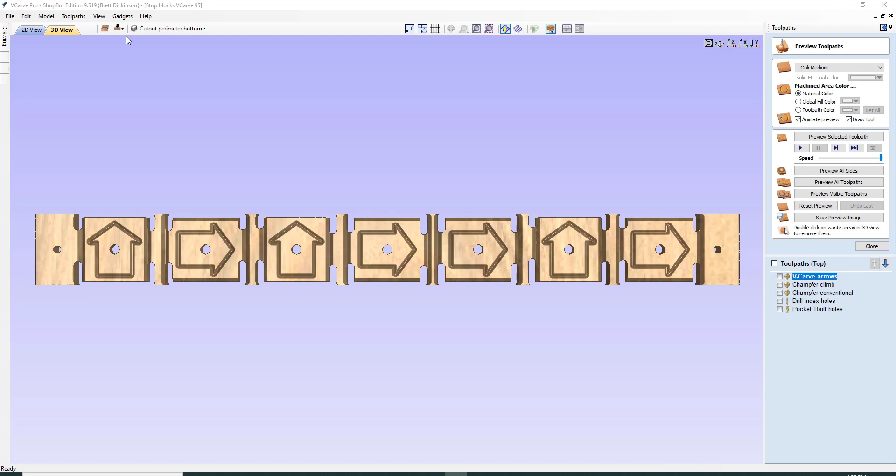First of all, we have the two views of the 3D view. This is what it will look on the top, and that is how it's going to look on the bottom.

To machine this, first of all, on the deck of the desktop right there, we have two index holes, one on each side. It's going to be flipped over like this, lengthwise. And these are the holes that are to be used for the T-bolts.

Next, these are the arrows, the directional arrows, which way they'll line up in the T-slots. Again, there's the other indexing hole right there. First of all, this is going to be screwed down. You're going to drill all the way through your oak material, all the way into the spoil board, and that's where the dowel pin will go. And these are our arrows, and that will be the first thing we'll be creating.

Next, we're putting a little bit of a bevel. You can see right there, we're creating a little bevel on the sides of each one of these blocks. That's done with the same V-bit, but with a profile toolpath. And this is the top already done.

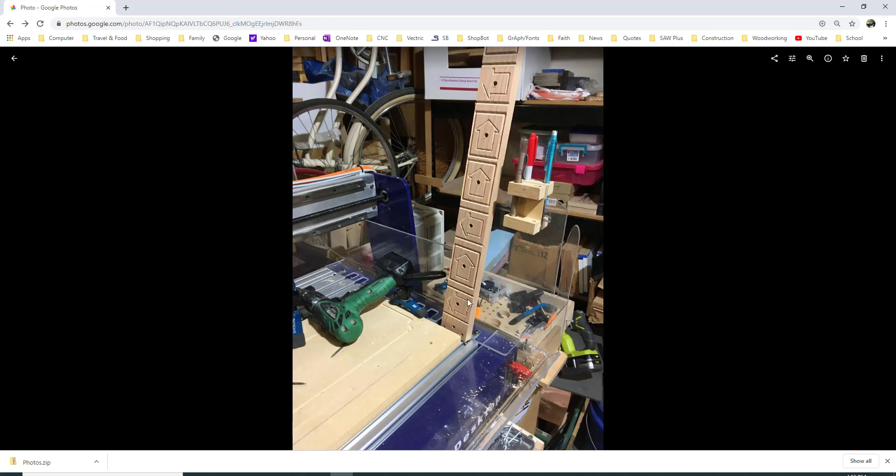It's ready to be flipped down. And you see there, right there will go a dowel, which is right there. And then we fasten that back in.

Once we've flipped and secured that piece, we're going to start machining the bottom side. The first thing you'll be doing is you're going to be pocketing out the middle. Of course, that screw is not to be put in until the pocketing is done. And the purpose of that screw is to give some additional support when we start doing the cutouts of the blocks. So we'll be doing a toolpath just for the center.

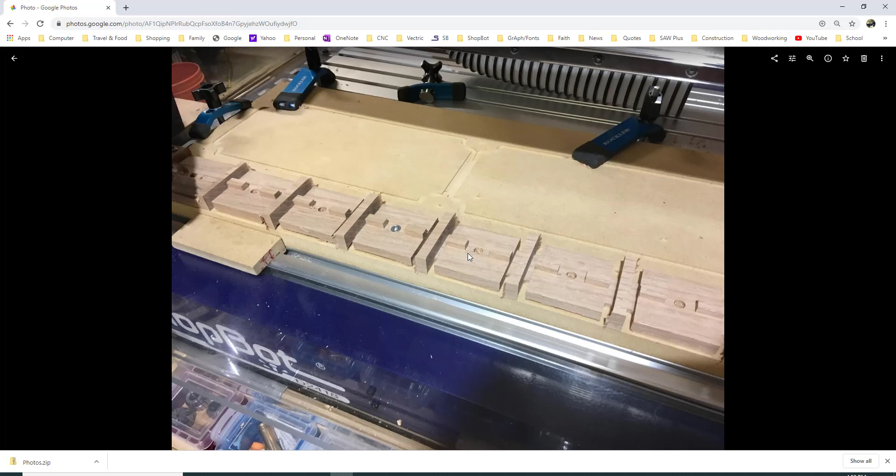Once that center is done, we're going to be putting a screw in the middle to secure that. And then the pocketing has been done already for all these, and then the cutout has been done with the tabs. And because there's not too much holding everything together, the tabs are a little bit thicker than normally you would do.

After that's done, you can either cut out your stop blocks with a miter saw, band saw, or jigsaw.

Make sure when you're using these power tools to cut the tabs that you are operating that machine safely, making sure that your hands are nowhere near the cutting and that you have enough material to support against the fence, for example. If you need extra, leave a little extra on this one side, do so. Remember this safety, always be careful.

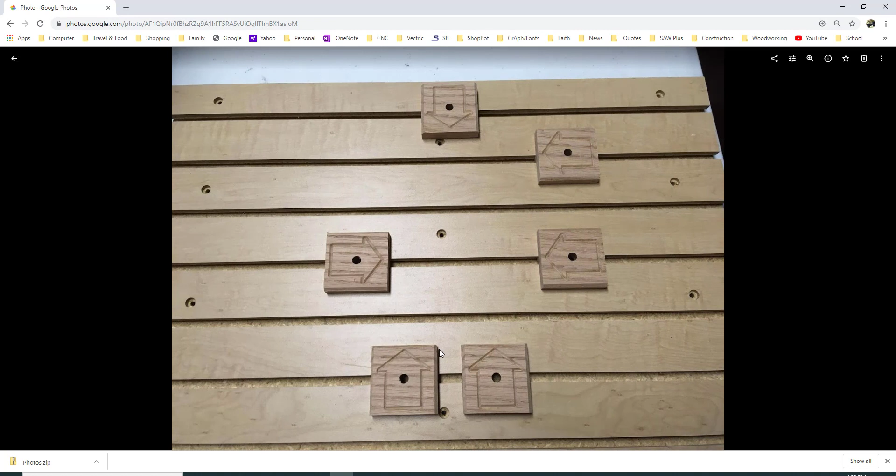ABCs of safety. And this is another one of the projects for the ShopBot certification. It's going to be a T-slot that can be put on any type of spoil board. And this is what these stop blocks are for, to help position your material and help hold it in place. Then you're going to be also creating the hold down clamps as well.

But let's get started with creating the arrow, and that's where we're going to start first. We've created a setup here of 3x3 with 0.75. It's going to be single-sided, and the lower left-hand corner is our datum position, standard modeling resolution. We're going to click OK. I've designed one of these arrows already, but we're going to go ahead and create your own right here, and I'm going to walk you through it.

First of all, we're going to have the anchor point on the lower left-hand side on this, and we want X to be 0, and Y we want to be at 1.8, and we're square. The width of this first rectangle we're going to create is going to be 1.67, and the height is going to be 0.60, and we're going to create that. That's exactly what we want.

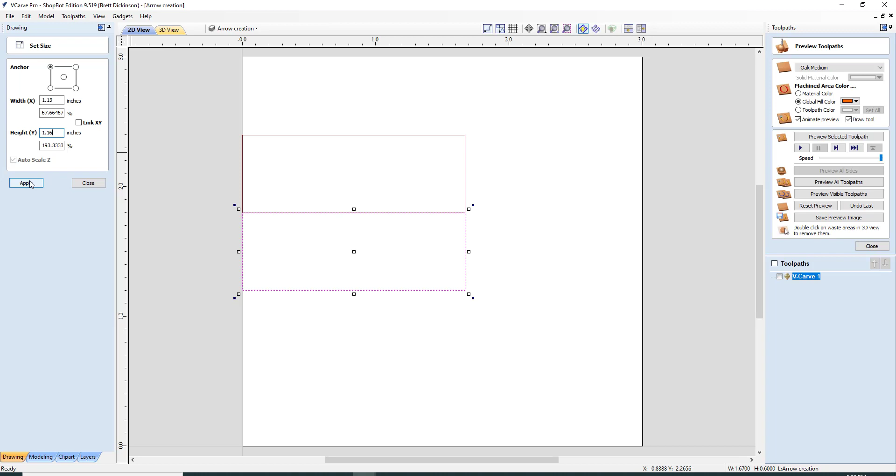And now we're going to change the dimensions on that by setting the selected object size under transform objects. We want the anchor point to be up in the upper left-hand corner. The width of this is going to be 1.13, and the height is going to be 1.16, and we're going to apply there. Okay, that's looking good right there. So first of all, we're going to go ahead and select this, and we're going to go ahead and center both of these.

Selecting that again, we'll center that. Okay, so we've got those centered. And then I'm going to click in this gray area, and if I click and hold down my mouse key, I can drag out a guide. This is 3 inches, half of 3 is 1.5. That's exactly what we want.

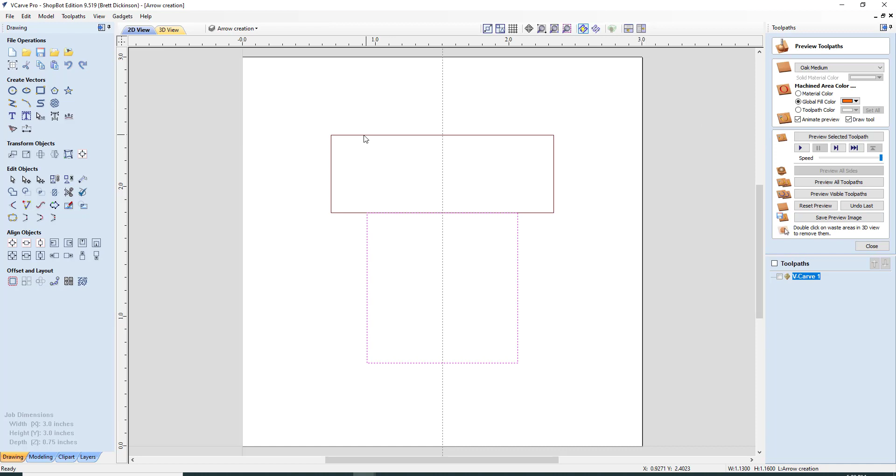So first we're going to create the rectangle portion of that arrow. I'm going to click right here, right click, and go to node editing mode. Now, most of you using node editing know it's a lot easier to just press the N key, and that's what we'll do to get out of node editing.

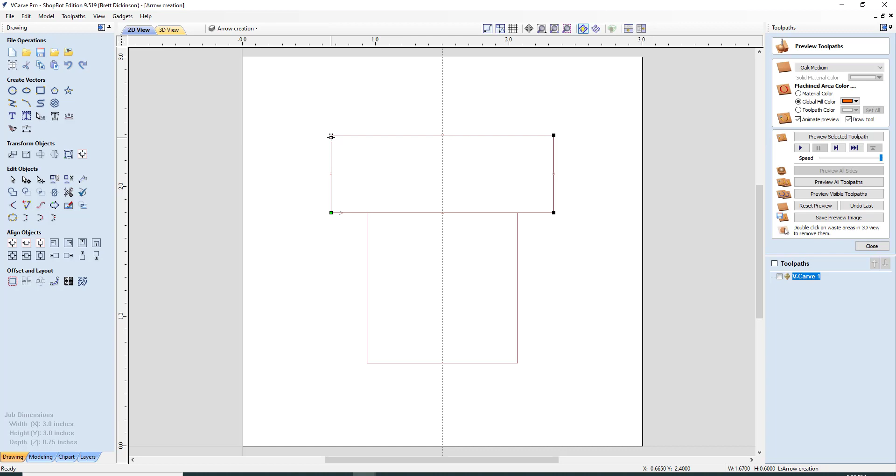First thing I'm going to do is make sure these are clicked on, and I want to keep those on. This is going to give a snap feature, and it's also going to be smart snapping. That way, when I get it over to the guideline, it's going to go right there and snap right to that guideline.

Now I'm going to go right over here to the other node, and I'm just going to delete that point. Boom, we've got the arrow right there. And I'm going to get out of node editing by clicking N.

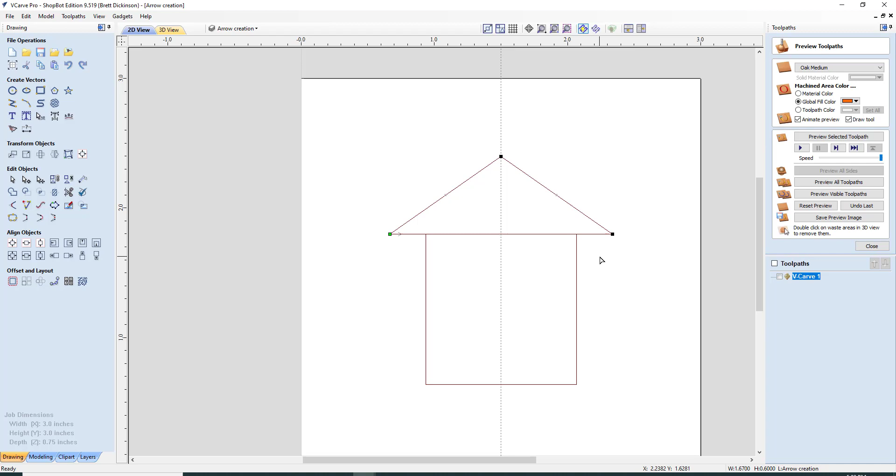I'm going to click twice on my bottom rectangle there and just pull it up a little bit. It doesn't move from the bottom, but just to increase the height of that. And then I'm going to select, by holding the shift key down, my rectangle and my triangle — excuse me, my apologies there.

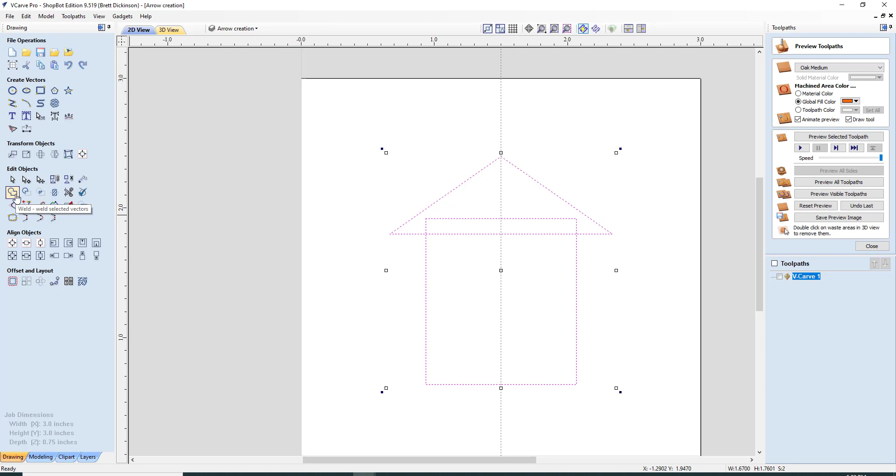Then we're going to go over to weld selected object, and everything is welded together there, so it's one continuous vector.

And now we want to create an offset there, and this offset will be 0.1 of an inch and go outward. We don't want sharp offset corners, so I'm going to click offset right there. That's looking pretty good. And then I've got my VCarve right there.

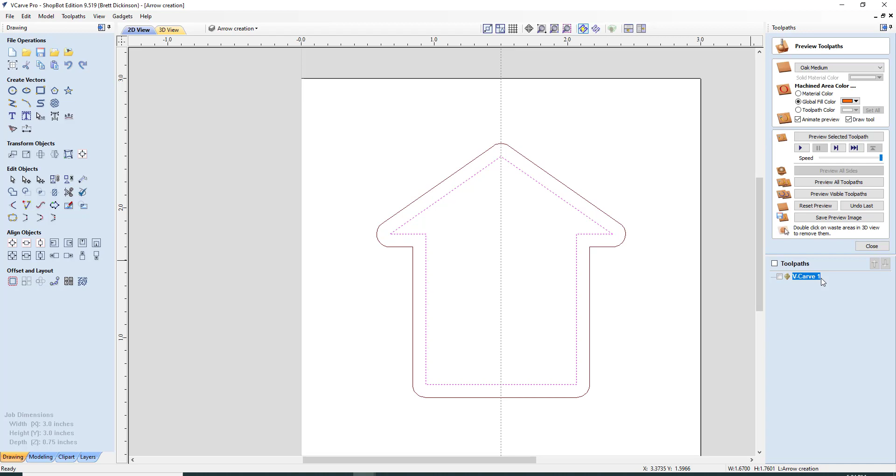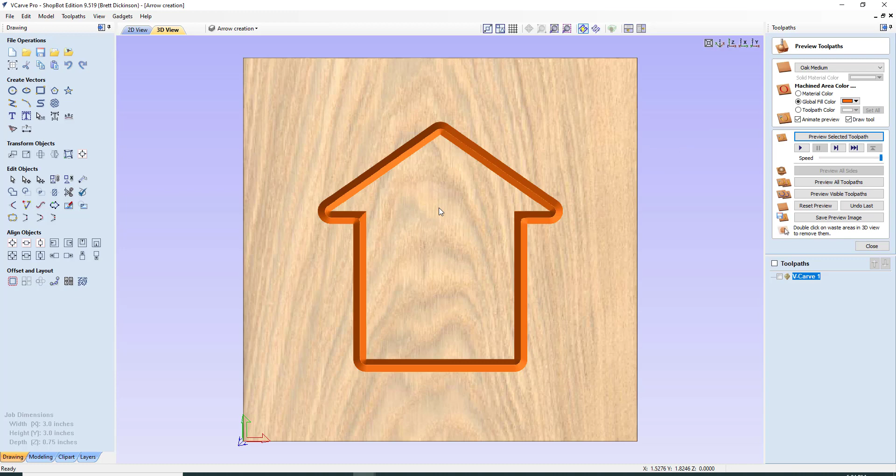I just want to see how that's going to look. So if I hold the mouse key down and go from right to left, anything I touch is going to be selected, and I'm going to calculate. We're going to preview that selected arrow. That looks really good. So now we're going to leave that there.

I'm going to click G to group, and now that will be ready to be copied once we start the two-sided machining project. We're going to be doing that in just a minute.

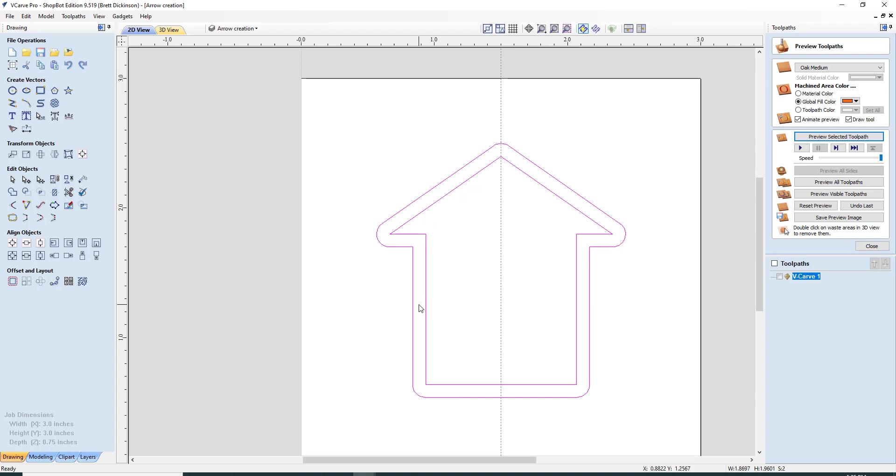You just saw how these stop blocks look. Now you will see how to design and toolpath them for yourself.

So we're going to start out in creating a new job, and notice what's going to happen as we click on some of these things. First of all, we want a double-sided layout. Width is going to be 24 inches and height is going to be 2.5. By the way, these and 0.75 for thickness.

By the way, you can get the oak that we're going to be using for the stop blocks at Home Depot or Lowe's. It comes in 2.5 width and usually comes 4 foot or 6 foot in length, easy to cut into 24-inch pieces. We want the Z0 position to be at the material surface.

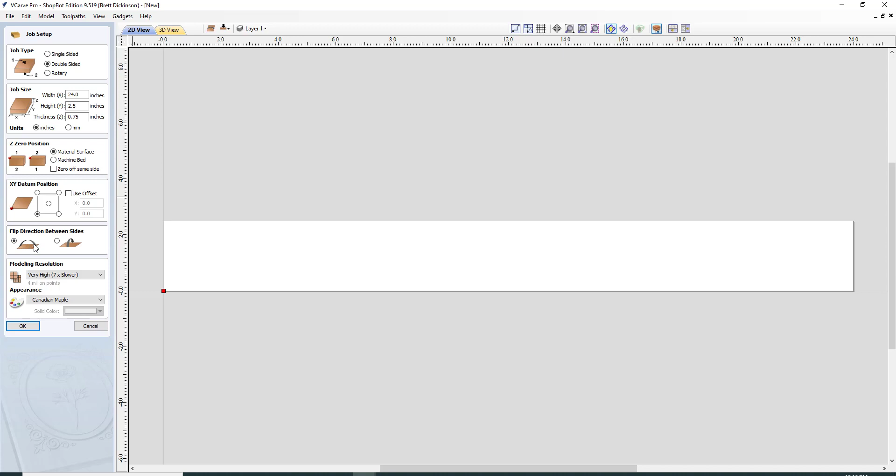XY datum, lower left-hand corner. And now there's a new item that will appear once you click double-sided, and this is the way we're going to want to flip our project. Modeling resolution are going to be very high, and we are going to click...

Okay. The first thing we want to do is we're going to start designing on the top here. And one of the first things we want to create are the holes for the index. These holes are going to be drilled through the 3/4 inch oak into the spoil board, and that's where your index pins will go.

First of all, we're going to click on draw a circle, and we want that X location to be 0.75. Very critical on this. Y right here in the middle, 1.25. We want a diameter of 0.25 on that, and we're going to click create.

Now we're going to make another hole, same diameter, but we're going to have it on the other end, and we're going to subtract 3/4 from 24, and that'll give us 23.25. And we're going to create another circle, and that's where our indexing pins will go.

Now we're going to create the hole that the T-bolt is going to go through for each one of these finished blocks, when they're done. For this one, we want to create a hole that's going to have a diameter of 0.32, and we're going to have it the same Y, but at 2.7 inches from the end, and there we have created that hole right there.

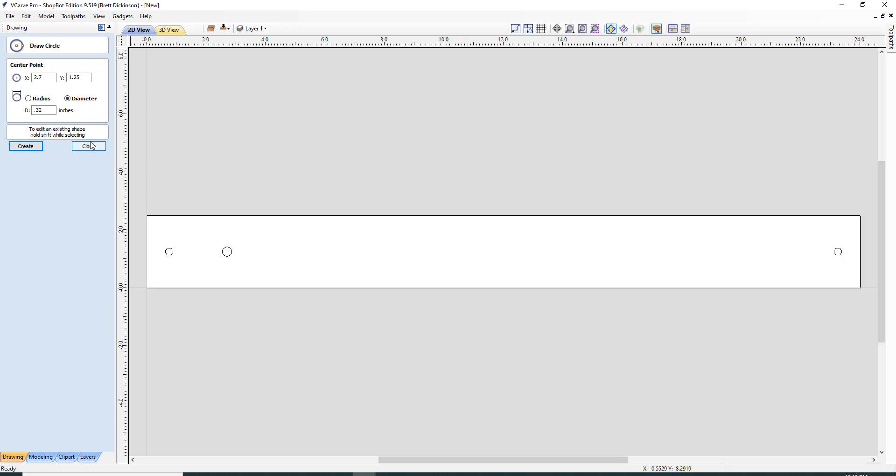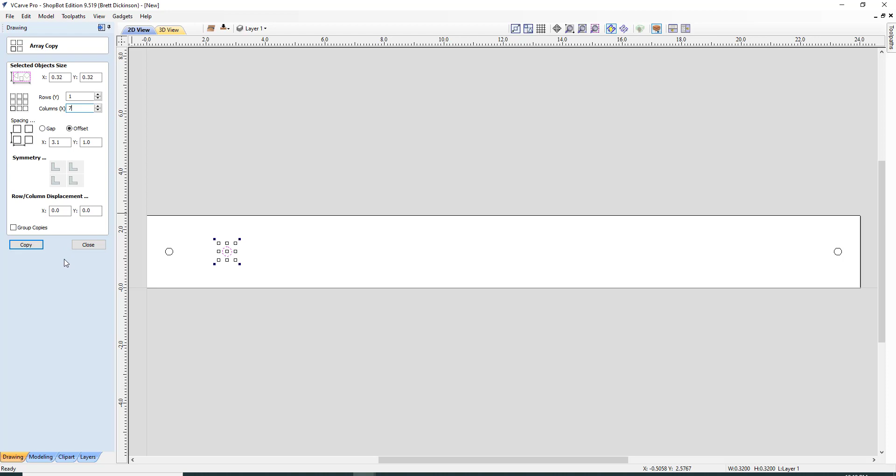Now we're going to want to use the offset layout array copy, and right there we want to create 7 columns, and that's going to be right here, 7, 1 row. The gap we don't want - we want an offset, because we're going to go from center of circle to center of circle, and that is going to be 3.1 inch. Notice right there, I've got the offset already in there, 3.1, and we're going to copy.

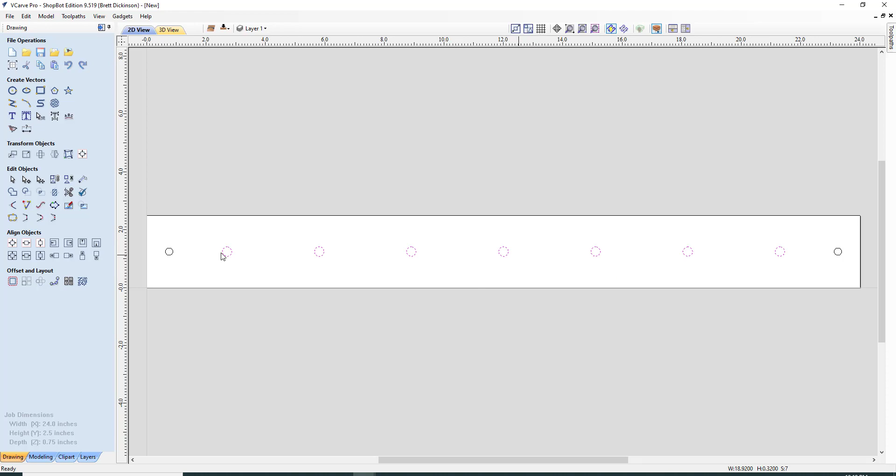That's perfect. Now what we want to have is we want everything to be perfectly centered, and that's what it is. Now if I close this right here, and I selected all those right there, try it again, and I click center, there'd be absolutely no movement. They are right in the center.

Okay, so the next thing we're going to do is we're going to bring in the arrows that we created. But first of all, let's go ahead and select all these, and these are all on layer 1. We're going to rename that layer, and we're going to name that layer T-bolt holes, and we'll leave that at black.

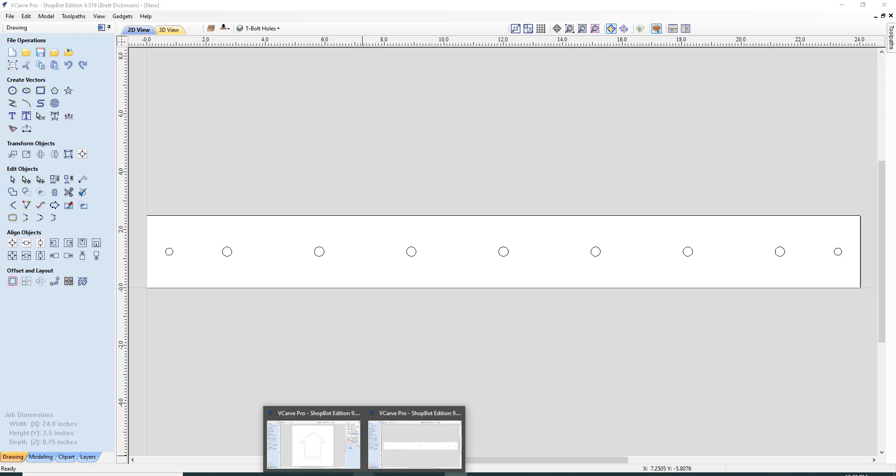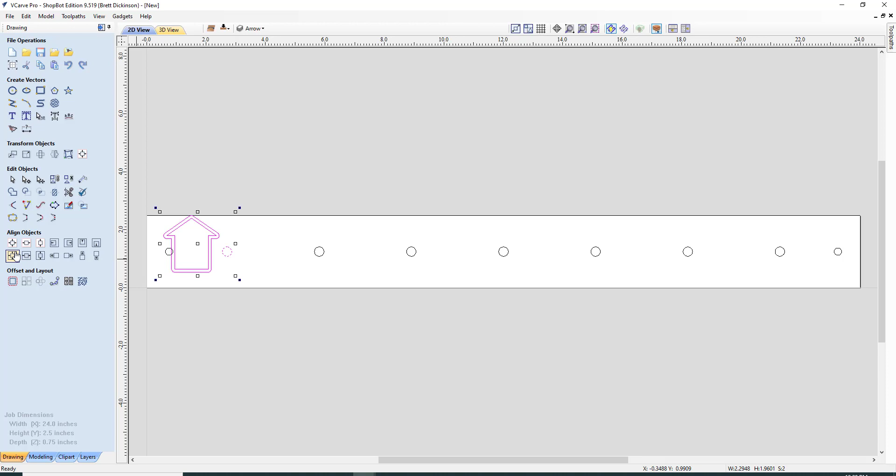Now that we've created those circles, we want to go ahead and bring in the arrow that we created. So we're going to go into that file, just a matter of selecting it, Control C to copy. We're going to go into our project file right here and Control V to paste. Now we want to center that right on that circle there, so I'm going to hold the Shift key down, and then I'm going to select over here. It says Center Objects on the last selected objects.

Perfect. Now we're going to be rotating those arrows. Otherwise, we could do a group copy on all of those. So we're going to create - notice that we have got an arrow, a layer that's been added there.

Now we're going to add a new layer, and that layer is going to be the perimeter top. We're going to call that perimeter top, and we're going to give that a different color and give it a brown. And we want that to be our active layer, so that's what it is.

And we're going to create a rectangle. Right now we're going to, that width is going to be 2.25 and 2.75. And I'm just going to click any place. That's perfect, exactly where it's at.

Okay, I'm going to close this. I'm going to hold the shift key down as I click that circle, and then we're going to center that again. And that's perfect. Now you're probably wondering, why is that line going outside the material width? Well, you're going to see why that is, because we want to create a bevel on both sides, but I want to have this flat, and this end we're going to cut so it's flat. But right here, we're going to keep this so it's flat right here.

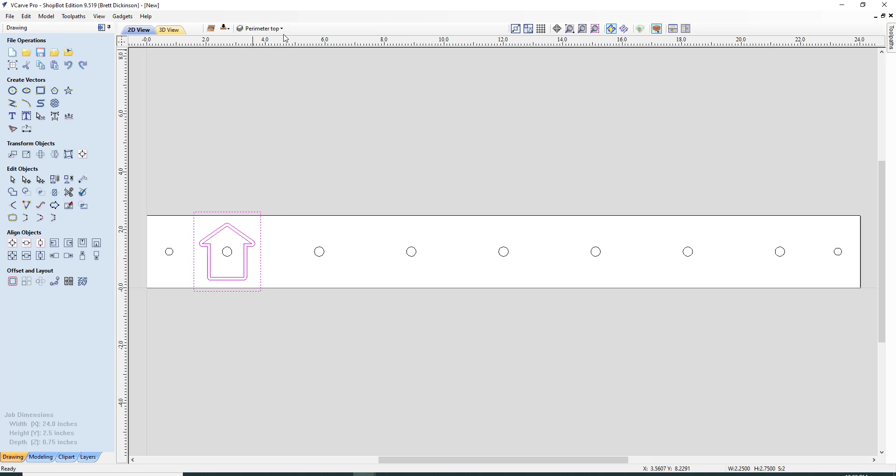And so I'm going to go here and I'm going to right click and select, going from right to left. Everything I touch with that mouse is going to be selected. Okay, and I'm going to group that for - well, actually, I don't even need to group that. I'm going to go Control C to copy.

Control V to paste, and then I hold the Shift key down on the next circle, and I'm going to bring that right over like that. Now, while that is selected, I'm going to take that off. I'm going to select these two items right here. And I could go over here and where this says rotate selected object, but it's a lot easier.

The shortcut is R for rotate. So we click R. I want it to rotate on that center right there, and we want it to rotate 90 degrees. Click apply. It's going the wrong way. We're just going to keep it till it goes right there. Perfect. Okay, close this. Now I'm going to hit Control V again, and notice what happens.

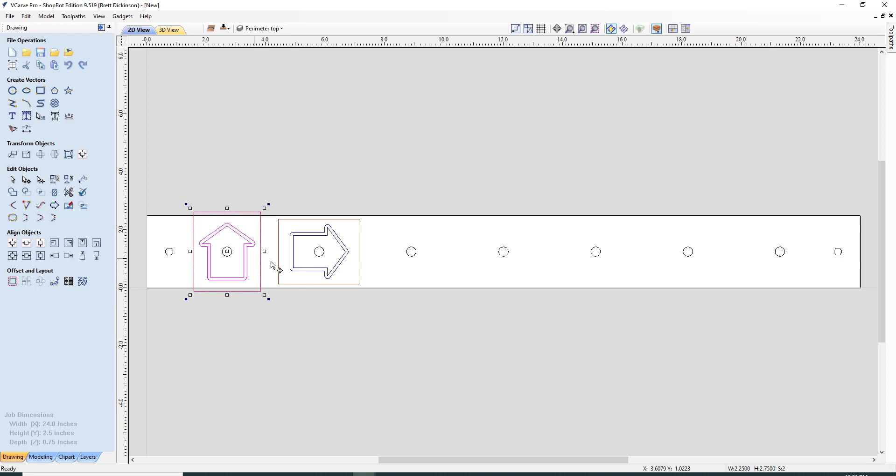Made another copy here. So I'm going to hold my Shift key, select that circle, center the objects, there it goes. That doesn't have to be rotated. Next, I'm going to go Control V again, hold the Shift key down, next circle, over it goes. But this one, we're going to rotate, so I'm going to hold the Shift key down, deselect this one right there.

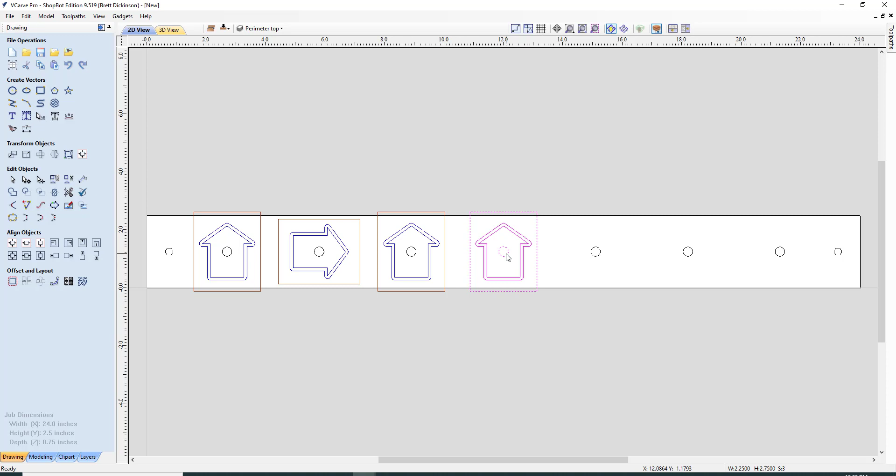And I'm going to either rotate it or just put R like I did, and we're going to click this for the center, 90 again, apply, here we go.

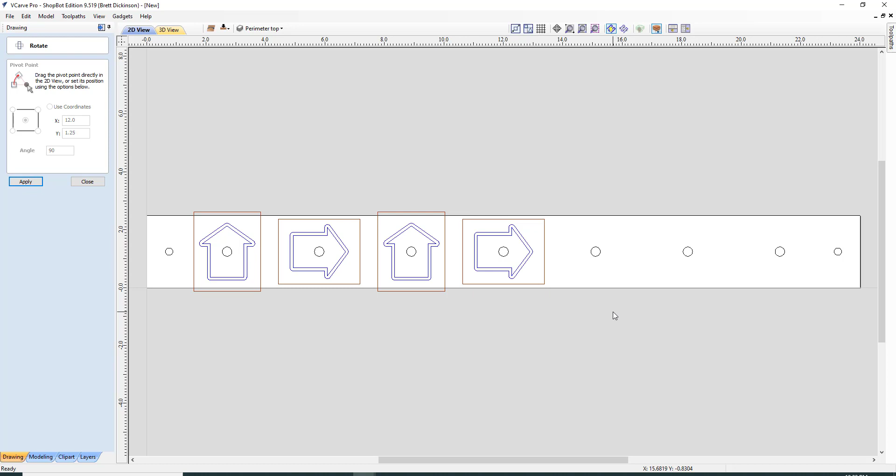Control V to paste, hold the Shift key down, close this, and center. That's where we want it. Then we're going to do the same, Control V to paste, same technique. Select this circle and center that.

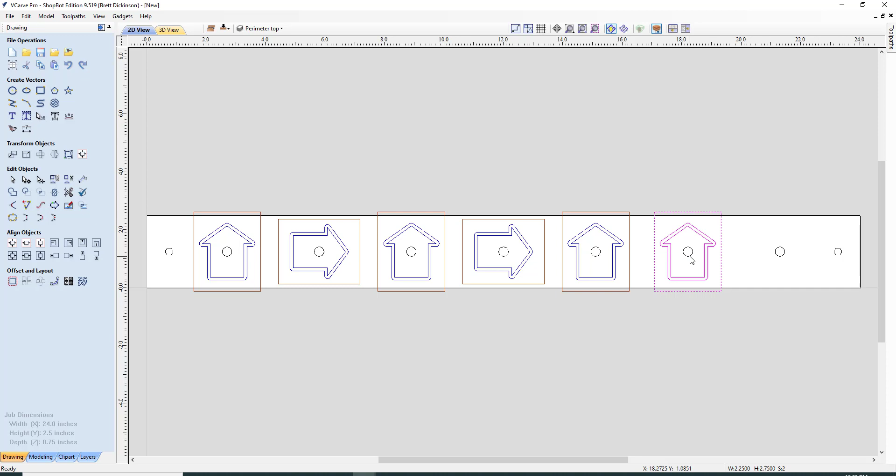And then this one, what is going to rotate? So I'm going to hold my Shift key down and click that little circle in the middle. R to rotate, right around the center there. Let's check the -90 and see what happens here. I'm going to click apply. Perfect, that's where we want it.

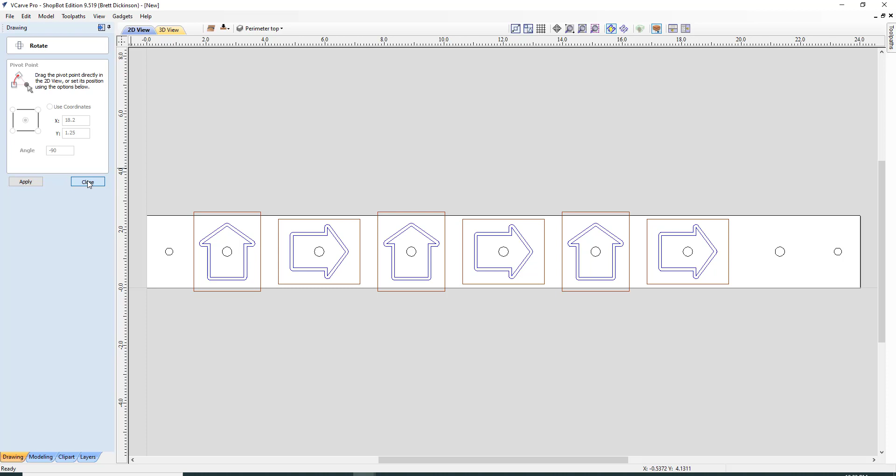And then just one more and we're going to be done with this to the top already. I'll close this. Control V for our last paste. Hold the Shift key down, click that circle, and I'm going to go over here and center objects. And just that quick, we have already created our top.

So let's take a look at that. We got perimeter, we got 3 different colors there. Okay, that is looking great.

So now we're going to be starting to design for the bottom. Now, even though we're designing for the bottom, we're going to stay on the top just for a minute. And so I want to take off the visibility of the perimeter top, take that off, and I want to create another rectangle.

And I'm going over here, and this one is going to be 2.5 on the X and 2.25 on the height. And we're going to put it any place we want right here. This is good right there.

Now what happened here? I'm going to Control Z. I'm going to go up here and take off my perimeter. And I want to add a new layer, which I want to be my active layer. And we're going to put that as pocketing bottom. And we'll give it a nice green color.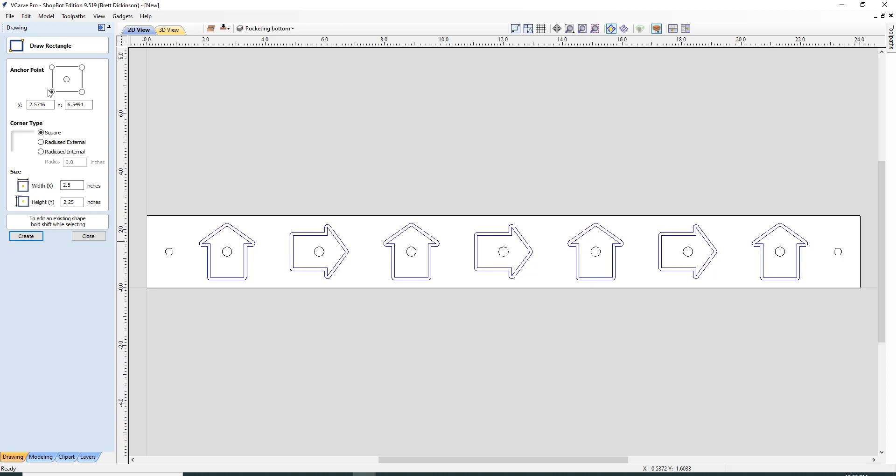Go back into my rectangle, 2.5 on the width and 2.25 on the height. That's fine. I'm just going to click right here.

Now that I've created my rectangle, I want to center it on one of these circles, but instead of centering it right down there, I'm going to go all the way to the end on this side, and now center that. There's a reason why - it's because remember, we're going to flip this. So once it's flipped, I want to be able to copy that array across from right to left to right without having to use a negative number.

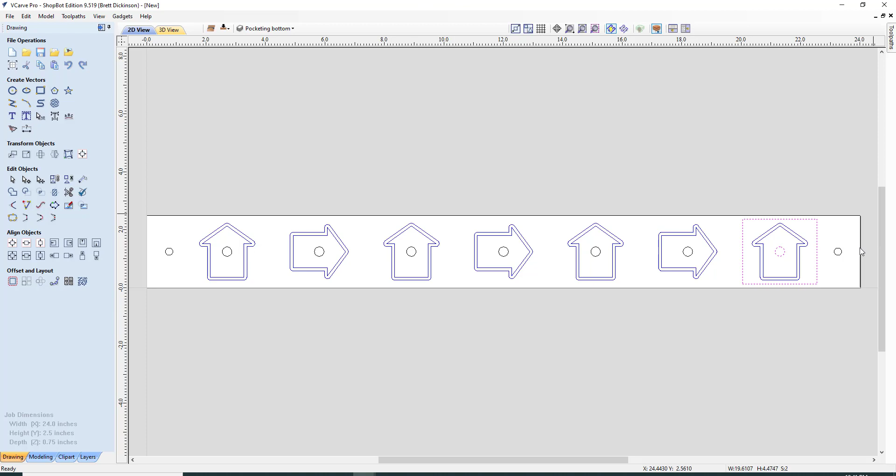So now I'm going to go over here and I want to right click on this and move to other side. So now I'm going to flip over here. I'm going to take off the other ones, even though they're visible.

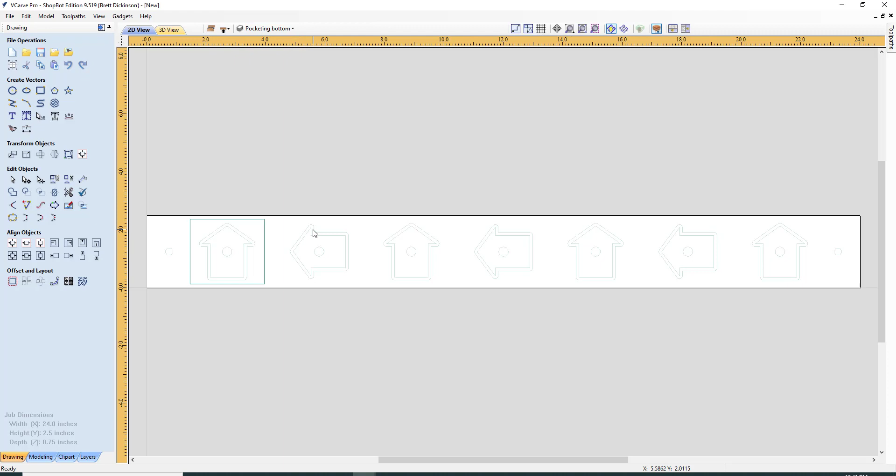There, you can't do anything. I can click here and nothing's going to happen. So this is just for positioning so you can see where things are going to line up. I could click up the perimeter top, everything would be there, but now it's just going to confuse me. So I'm going to click all these off right here.

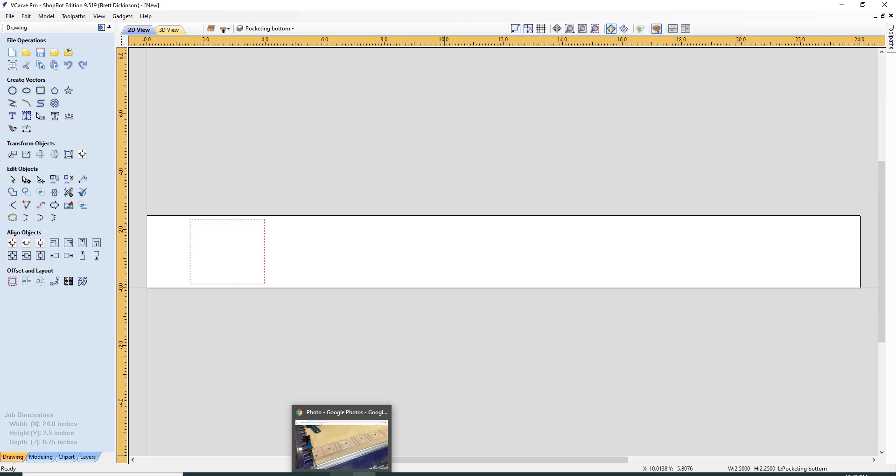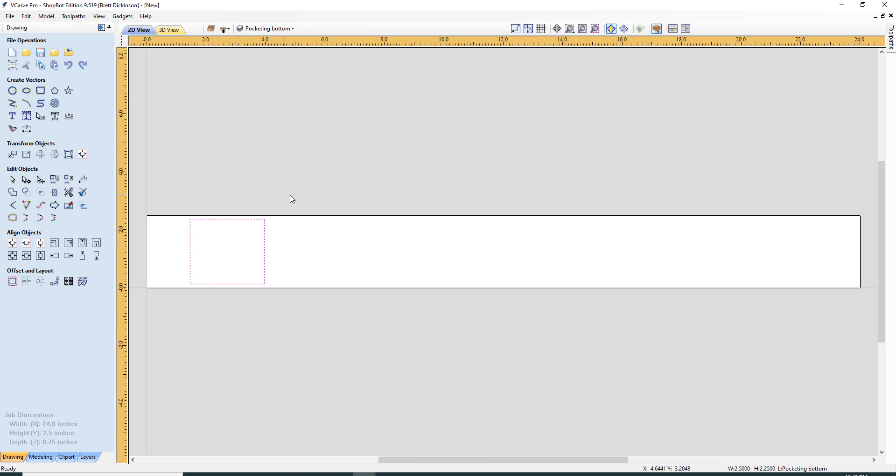So let's get back to our drawing right here, and we're going to want to make a similar design here. So what I'm going to do is just Control C to copy, Control V to paste, and notice the colors change. It tells me I've got a line on top of a line.

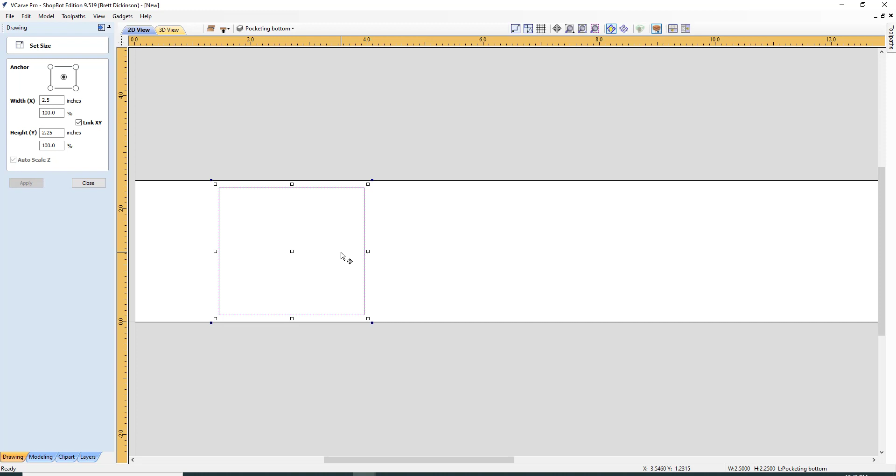And now I'm going to go up here and transform that line. I want to do everything from the center. We're going to be cutting that channel on the T-slot jig, it's going to be 0.3125. So I've done some experimenting, and 0.31 is a good width that will work perfectly.

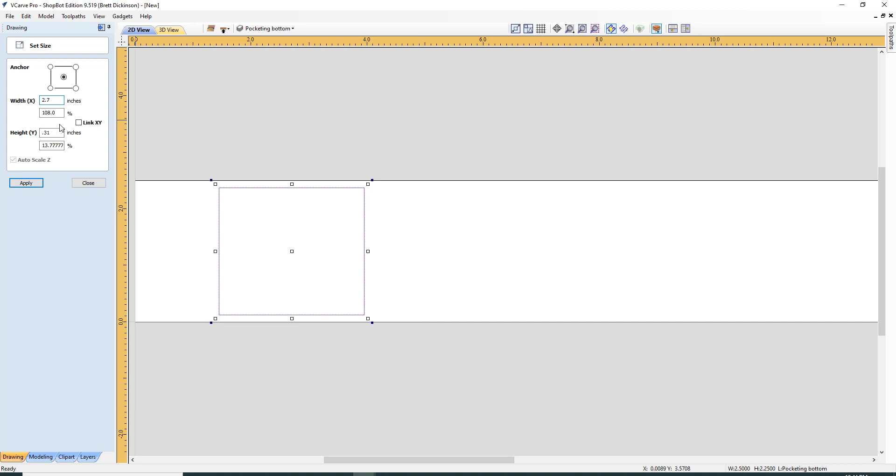I need to unlink these first though. 0.31, and I want the length to be slightly longer than what we had originally. So it doesn't matter what I put. Let's say I put 2.7 and click enter. Perfect, that's exactly what I want.

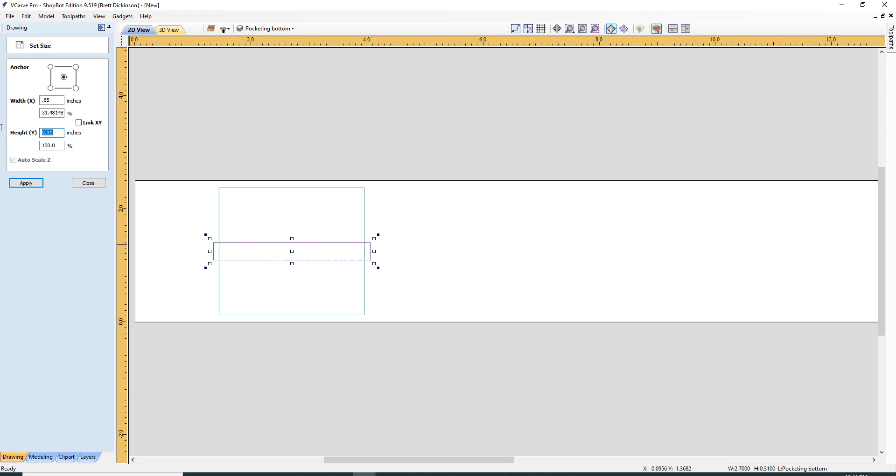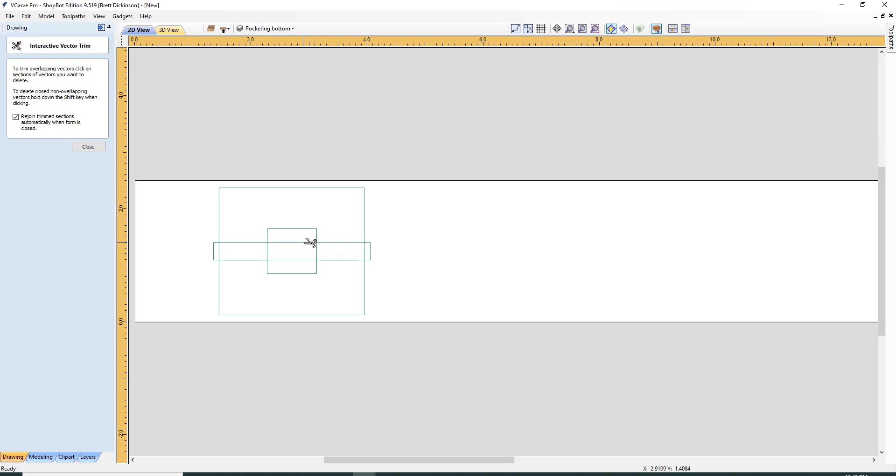I'm going to close that. And now we're going to get those handy little scissors, those interactive trim the vectors, and we want to rejoin them. So we're going to start cutting this out. I want this to be a space right here, perfect here.

And this is what we're going to want to have. We want this piece. This is critical right here. We don't want to cut those out. So now this is going to be the area that we're going to pocket out.

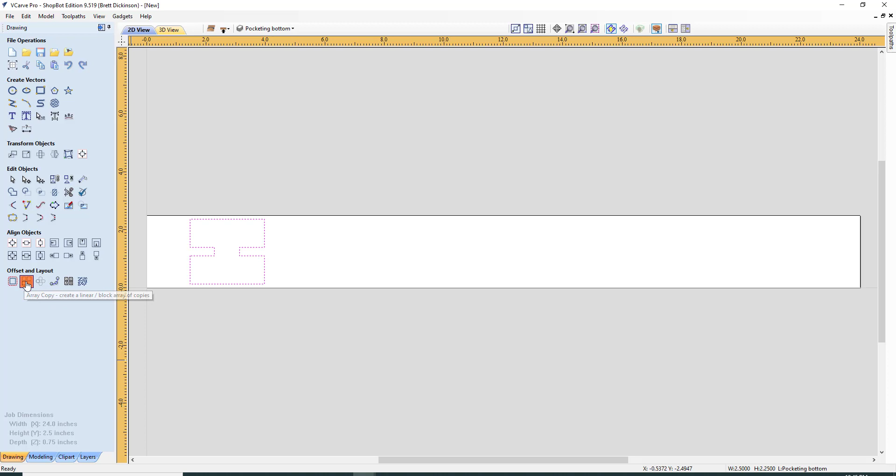I'm going to click F to fit everything in, and now I'm going to space these out. We're going to go to our array copy. And this time, instead of doing an offset, we're going to do a gap, and that gap is going to be at 0.6. We want 7 of these, and we're going to copy that.

Okay, and they're perfectly centered. So the last thing we need is we're going to need the vectors to cut this out.

And so we're going to make another rectangle. Now I don't have to do it from the top because now I have something to center on right here. And so this one is going to be, on these, it's going to be square, 2.25 by 2.25.

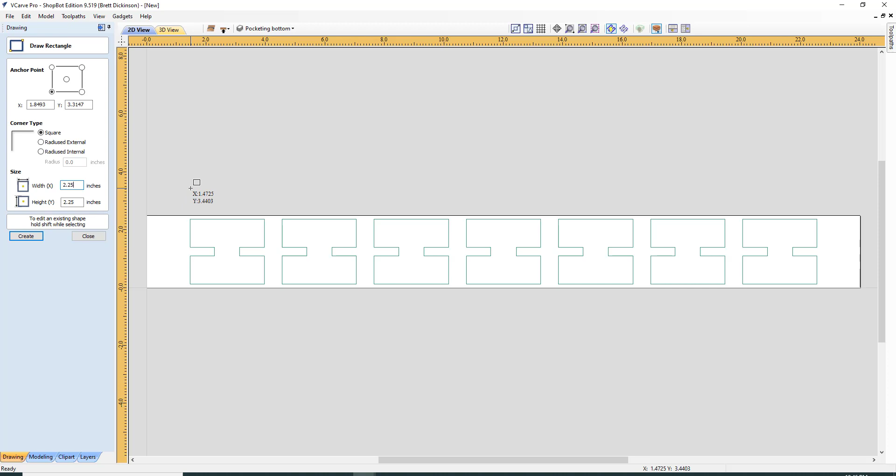And I'm going to click that right there. And I'm going to right click this and I want to move to new layer. And we'll click that new layer right there. And we want to name that layer cut out perimeter bottom.

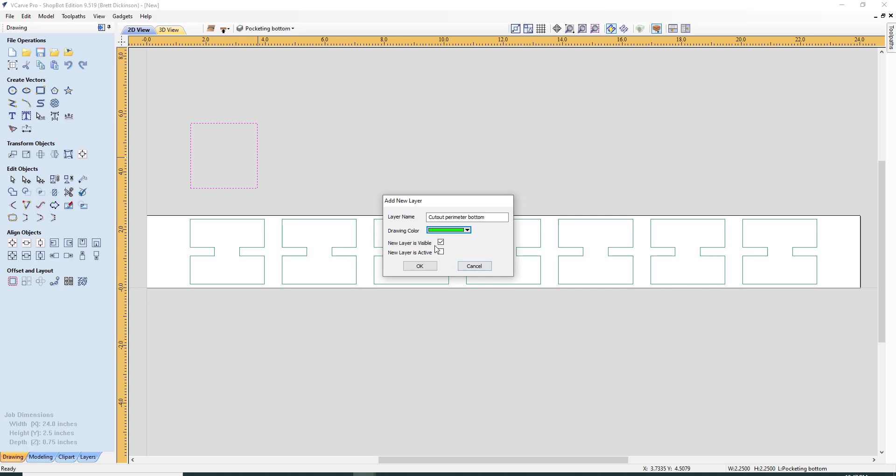And we'll give it another color here, bright green. And we want this new layer to be active. So we'll click OK.

So what I'm going to do here, I'm going to select this, hold the Shift key down and select the area I'm going to pocket out. And we're going to center that perfectly. That's what we want right there. Good, that's going to work out fine.

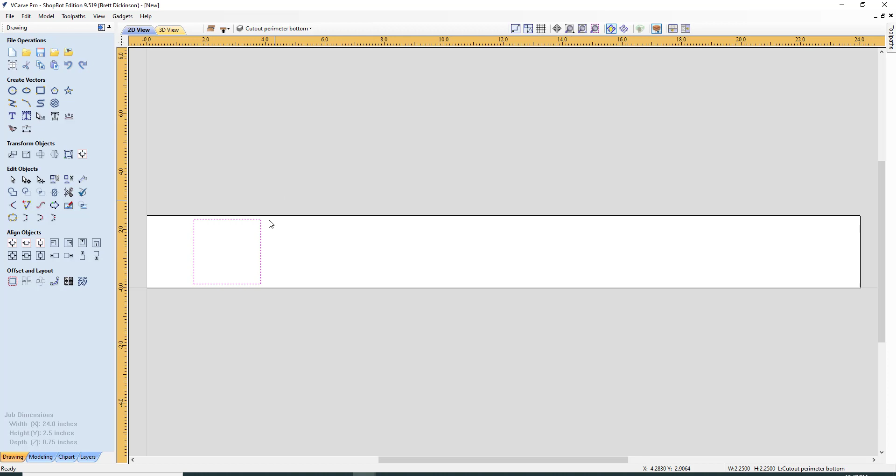And so just to make it easier for me to see, I'm going to take off my pocketing bottom. That just leaves me with this one. And I'm going to do another array, and this time it's going to be a gap of 0.85.

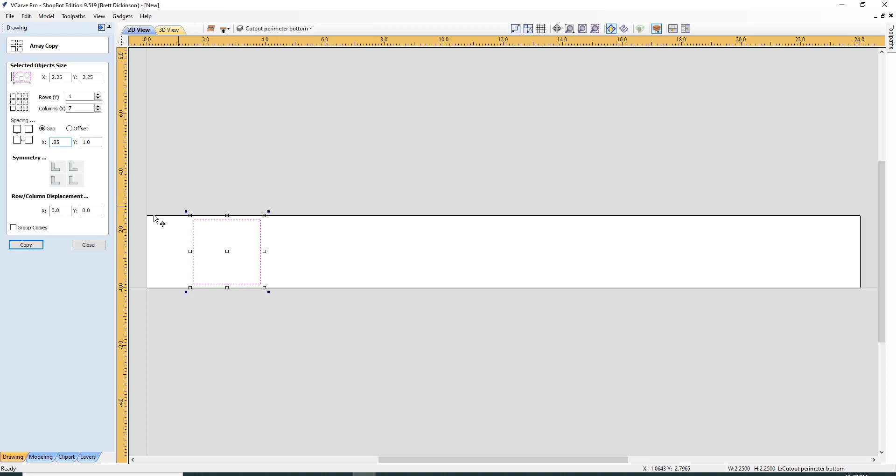Now you wonder, why did you come up with all these things? Well, it took a lot of experimenting to come up with this. So this is something you can experiment with as well if you want to change the design on these stop blocks. But 0.85, we're going to copy that.

Okay, and again, there we have it. Now, if I wanted to select everything here and then check to see if they're centered, no movement. Okay, so everything is looking good.

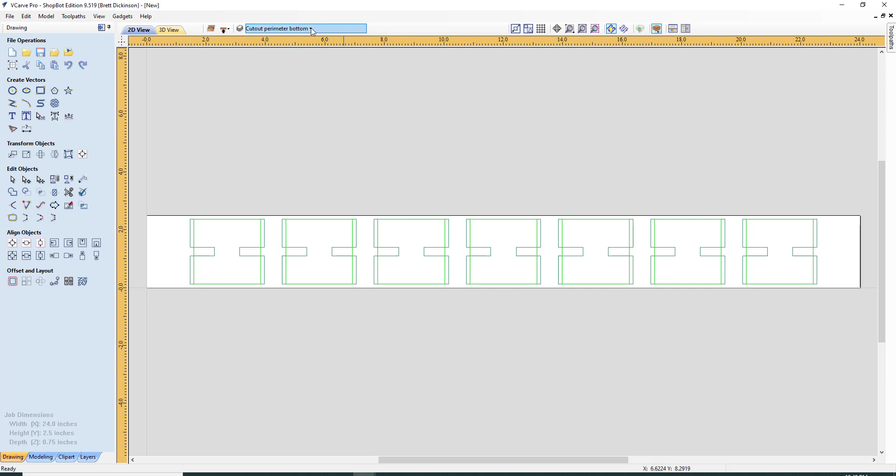So now I'm going to see there's what our bottom is going to look like. And then as I click on these, notice you can lightly see where those are at. So what that's going to do is as these are turned, everything's going to be cut out square.

Now, even though this is going to have a bevel cut, the way that that top is with the V-bit, it's all going to be cut square, so every block is at 2.25 inches square. So now that's perfect.

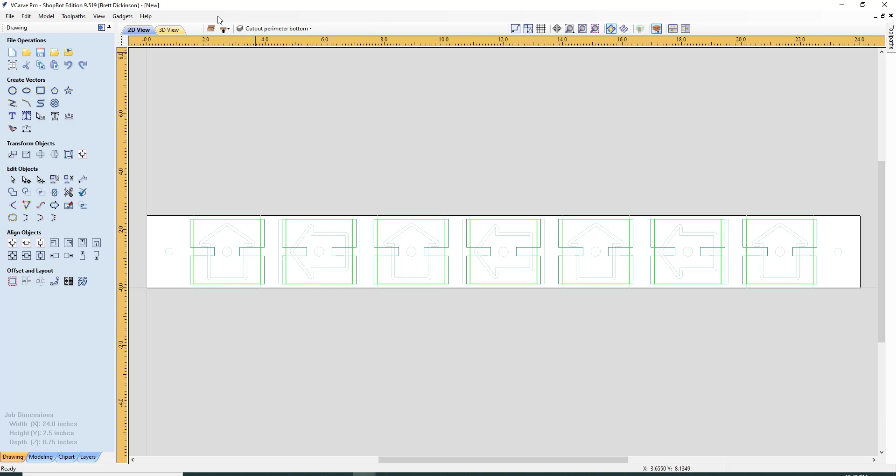Let's just flip up here at the top. You can see right there. You can see now you can lightly see the bottom and the top. If I want to select something here, it is selectable.

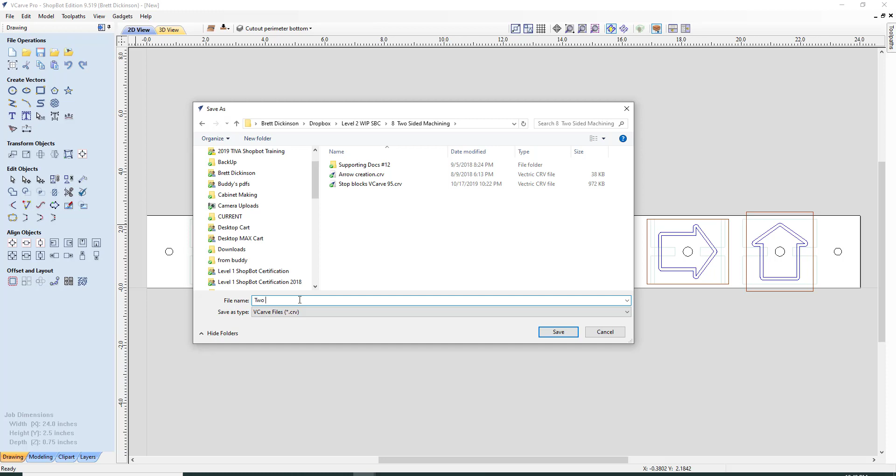So now we're finished with our design, and we definitely want to save that, save it to your supporting docs file. We're going to save it in the ShopBot curriculum file, and that's going to go into two-sided machining. And we're going to put two-sided machining stop blocks and click save.

And that should have been done way in the beginning. Okay, so that's it for now. Then we're going to be starting up with our tool pathing on the next tutorial video. Thank you.